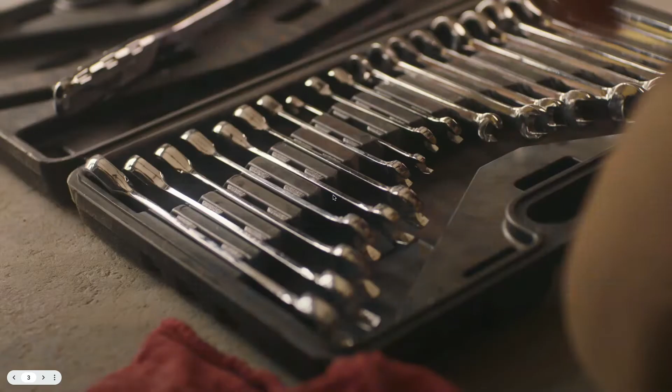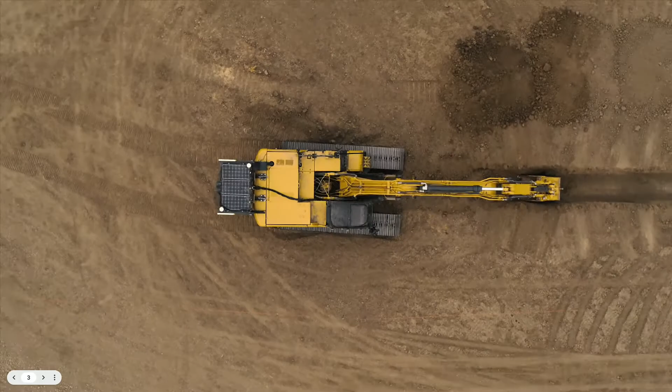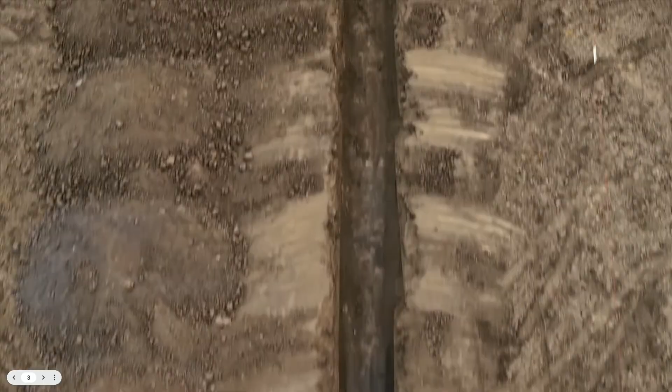We build the same way our grandparents did, with our own two hands. But the tools in our hands change. Built Robotics has developed the most advanced tool available on any job site today, the Exosystem. It transforms any excavator into a fully autonomous robot made to dig the earth. It's powered by a liquid-cooled computer with sub-centimeter RTK GPS, high-efficiency solar panels, an all-weather, all-terrain design. And you can easily switch from manual to AI mode with a flick of a switch. But most importantly, it can dig.

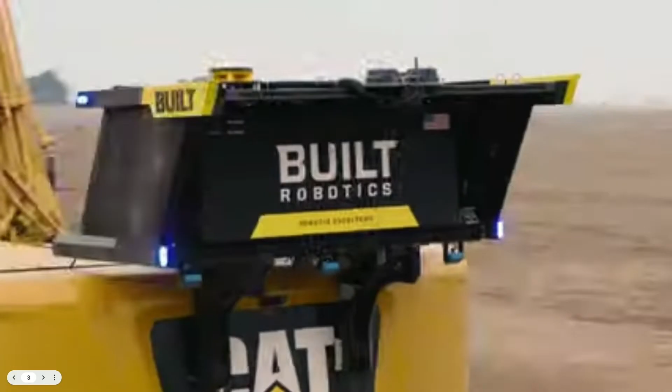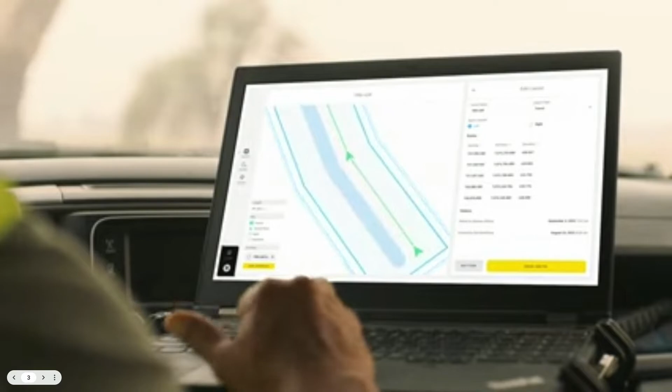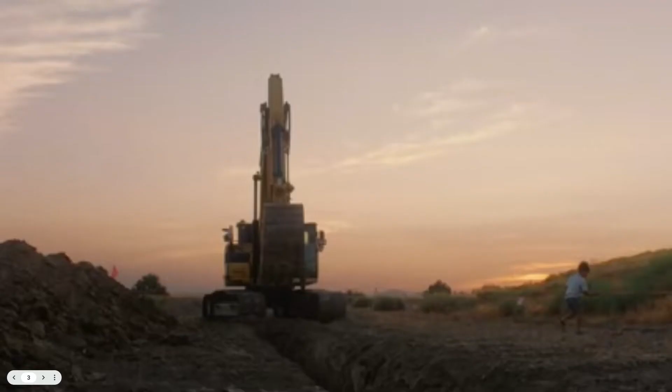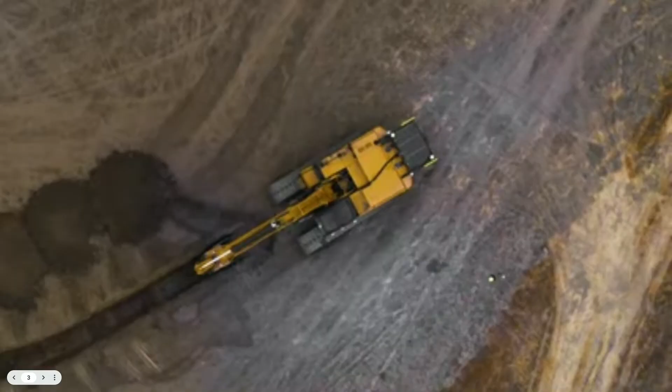Does the idea of an 80,000-pound robot scare you a little? You'd be crazy if it didn't. That's why we've developed an 8-layer safety system with 360-degree camera coverage, proximity radar, 110 decibel safety alarms, ultra-bright LEDs, high-vis barriers, a digital geofence, and hardwired and wireless emergency stops. Because when it comes to safety, more is more. We're here because of the builders who came before us. They created the world we live in, our roads, our cities, our homes. And when they needed a tool to overcome a new challenge, they invented it. Now, it's our turn.

So that should have given you a sense for what we're talking about. These are fully autonomous robots. We take existing heavy equipment and we can upgrade it to enable full autonomous capability. And we'll talk a little bit more about the product in a second. But just to give you a sense for who we are: a construction technology startup based in San Francisco, California. We were founded back in 2016, and we have achieved a lot in that time. We have over 18,000 hours of autonomous operation to date with no safety incidents, which we're very proud of.

We are a venture capital-backed company. We've raised over $100 million from some of the largest and most esteemed venture capitalists in the world. And we have a phenomenal team that sits at the cross-section of technology and construction. You can't have one without the other, and so we believe that you need to bring the best minds from both in order to build a tool that's actually useful for this industry.

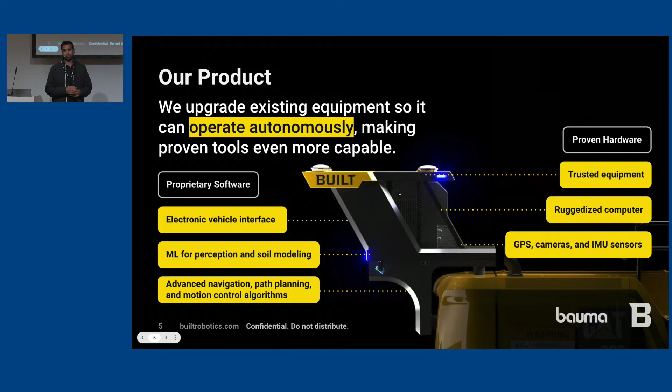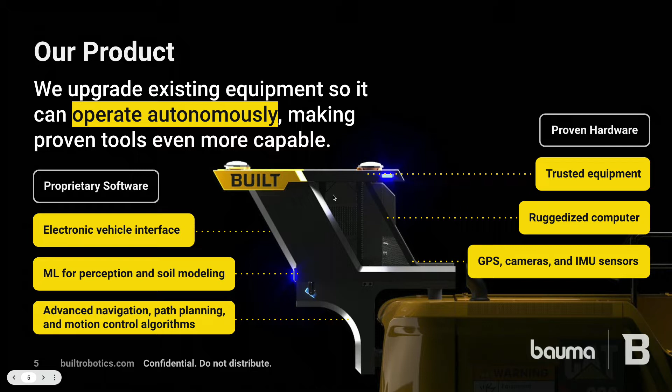So what's the product? Some people ask us, are you building these excavators? The answer is no. We take existing heavy equipment that the largest OEMs, Caterpillar, Volvo, Komatsu, build, and we can enable autonomy by installing what we call the Exosystem. And that's what you see here. The Exosystem is this unit that is comprised of a handful of different sensors, RTK GPS, IMU sensors, and we basically install that on this existing heavy equipment. And those sensors are basically what we use to collect information about the environment.

So every second, we're collecting thousands of data points on what is the orientation of the excavator, where is it located, where is the bucket, where is the stick, and we can stitch all of that information together in order to make intelligent decisions on how to actually move the excavator. So the way the decisions are made is the software, and that's the core piece of the Built Robotics technology. So we have a team of roboticists and software engineers who have built this reliable software that runs on our onboard computer, and that software is basically sending signals to the excavator in order to actuate the hydraulics and actually move and dig the dirt and complete the task that the machine has been given.

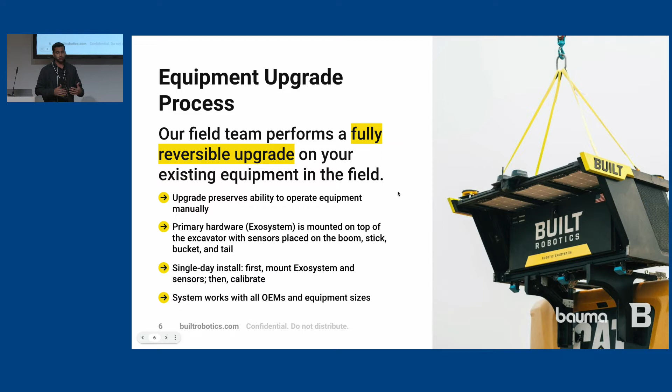So that equipment upgrade process is actually a very simple, non-invasive process that we've developed. So the Exosystem is mounted to the counterweight of the excavator, and it ties in to the onboard electronics of the excavator itself. We actually preserve the manual operation capabilities of the excavator. So we think that's very important. Robots will be very good for certain tasks, but from time to time, you still may need a human operator to jump in the cab of the excavator and take over manually.

And for that, it's a very simple flip the switch, and you can take over manually. So we think that's strategically very important. It is a one-day install, so it takes a couple of hours to actually install this unit onto the machine.

And then we also run a calibration process, because every machine has unique dynamics. And so we want to make sure we capture that. So we run a simple script, and we're able to capture all of that. And then your machine is ready for the tasks at hand.

And it's also important to highlight that our system is compatible across OEMs and equipment sizes. So we think it's also very important that we are not dictating what contractors need to use, what type of equipment. We want to build a solution that will work with whatever equipment that you guys are using.

The second side of our technology that's important to highlight is how do you actually communicate with a robot? So we install the exosystem onto the machine. The machine is now capable for autonomous operations, but a human supervisor still needs a way to communicate with the robot, and that's where our user interface comes in. So the user interface is a very intuitive software solution that we've developed.

You can run it on a laptop or a tablet, and basically at the start of a day, a robotic equipment operator will come to the machine, they'll fuel it, grease it like they normally do, and they'll turn it on. At that point, you would launch this software application we call Everest on your laptop, and you can connect to the robot, and then you would communicate to it what task you want to complete that day.

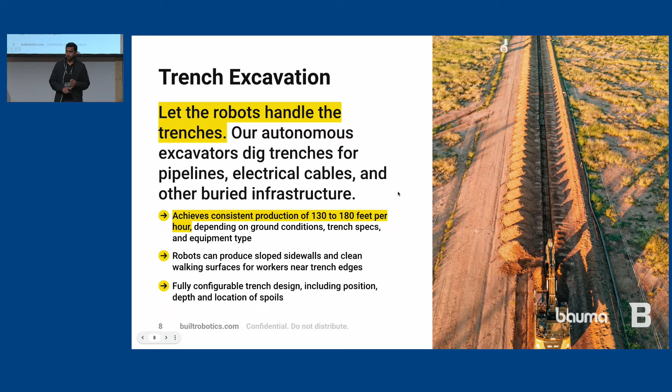So that brings me to the specific task that we have launched commercially for the robots. So trench excavation is something that these robots are being used for today on commercial job sites in both the US and Australia. Trenching was one of the first products that we rolled out because it's very good for robots. Basic, repetitive task that takes place over large quantities of earth.

And so there's a big opportunity to create a lot of value in the construction industry, but it's also a particular task. It's narrow, it's focused, and so we can make sure that we're deploying a product that works day one and that's reliable in the field.

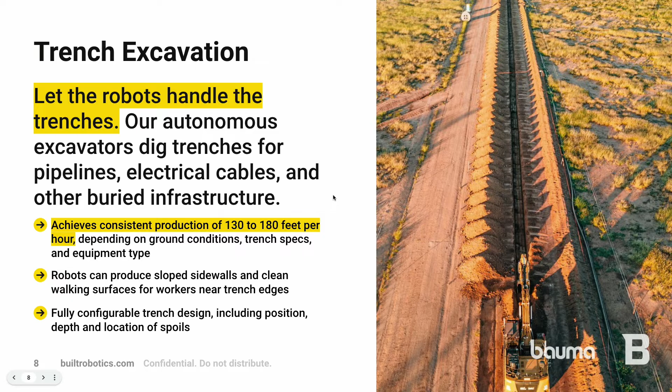I think it's very common for a lot of technologies to try to take on too much and to try to over-engineer solutions, and what you end up with is more of a science experiment than an actual commercial product. And that's what we've really focused on as a company, to make sure that we are actually shipping products to the field that are useful for customers day in and day out.

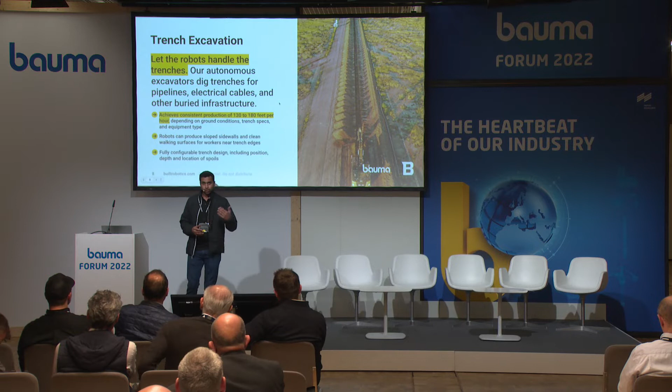So on trench excavation, I'm sure many of you are familiar, but this is a critical piece of work that happens any time you have buried infrastructure for large sites. And so the types of projects that Built Robotics has been deployed on tend to be large greenfield infrastructure projects. As you can see from these pictures, you're in the middle of nowhere, and these are big scopes that are taking place over long distances. So pipelines for oil and gas, electrical cables for solar, wind, utilities, things like that.

And one of the problems we're solving by working in such remote environments is that it's often very difficult to find skilled labor to work in these places. So a lot of contractors in many countries around the world are struggling with a challenging labor shortage. And so our solution is meant to help automate basic repetitive tasks, so you can reallocate your skilled human labor to higher value tasks on the job site.

The robots basically dig these at 130 to 180 feet per hour. So that's anywhere from 40 to 55 meters per hour. And we can produce sloped sidewalls and clean walking surfaces along the trench. So contractors are finding that the output and the quality of the work that these robots are producing is usable, and they're able to actually put the pipes and the electrical cables in the ground right after the robot.

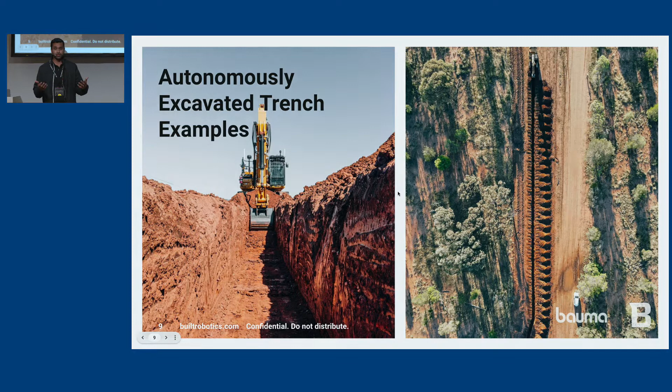When you have a computer digging, it is very precise, and it will do exactly what you asked it to do. And so the room for errors goes down significantly. You can ensure that the output of the work is within tolerance. And so these are some of the other benefits that we see from robotic solutions in the construction industry. We like to think of it as an outdoor CNC machine. So once you've provided the parameters, the locations of where you want the task to be completed, the machine will go and do that very precisely.

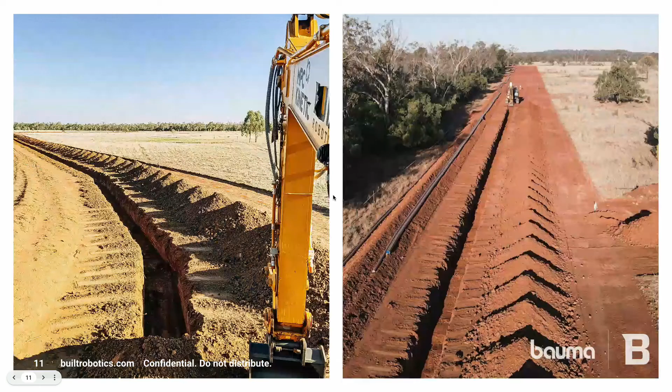And then it's also worth mentioning, I get asked a lot, can it dig curves? Can it dig not just straight lines? And the answer is yes. Basically, you need to provide the robot the endpoints, the GPS endpoints for where the trench needs to go, and then the robot will connect the dots.

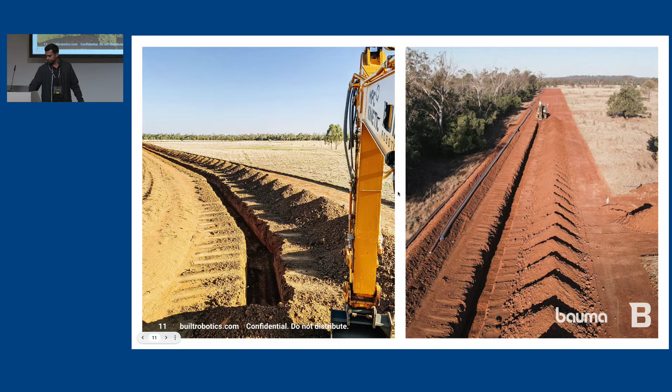So why is this important? Why has Built Robotics embarked on this journey to unlock automation for the construction industry? And I think that's the theme of today. A lot of people are asking this question. We kind of boil it down to two big categories. The first, which is incredibly important, is that there's an opportunity to keep workers safe.

If you can take operators out of the cab, out of harm's way, when you're doing a lot of these mundane, repetitive tasks, you essentially are taking workers out of the line of fire. I think we all take that very seriously. We want our people to be safe. And so we think of this as another tool in your toolbox. When it's appropriate, you can actually get the workers out of harm's way and reduce safety incidents.

The second piece, of course, is transforming profitability. I think there's a lot of great data out there that shows that labor productivity in construction has actually decreased since the 1950s. We are an industry of innovation. You look at the equipment outside, the engineering marvels that we've achieved as an industry are next to none. But I think in the last 30 to 50 years, while other sectors like manufacturing have embraced new processes, new technologies, construction has had a tough time to actually embrace some of those.

And you can trace some of that to it being an operationally intensive industry. Taking risks can have incredible downsides. You need your projects to be delivered on time and to scope. And it's very, very hard to try something new. And so I think automation, though, is the next biggest thing after hydraulics in the construction industry. And it's going to really force us to rethink how we build.

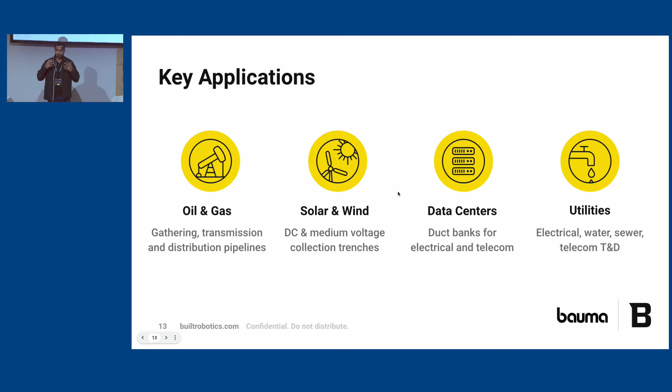What you'll notice is not on this slide is working in dense urban centers, working in congested environments. Autonomy is not quite ready for working in some of those confined spaces where the judgment, the eyes and ears of a human are going to be better. That being said, when you think into the future, we certainly believe this technology will continue to improve, sensor technology will continue to improve, and we will be able to address more and more of these cases over time.

And again, not to just rely on visual cues, we have a sound. We have a beeping sound that plays as well, and that is an audible cue. So just in case you're not looking at the robot, you can hear it, and you'll know that there's a robot working in the area.

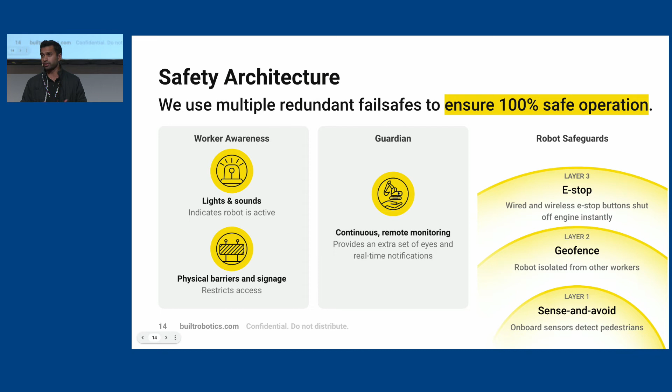And finally, the last layer of safety here is an emergency stop. So we have wireless and wired emergency stops. The wireless stops work from a far distance. They use radio frequencies in order to safely stop the robot. These are safety-rated systems, and it is the fastest, most reliable way to stop the robot if anything were to happen on a job site or if you needed to stop for any unsafe conditions that are observed.

So like I said, we didn't want to just be a science experiment. To us, building a commercial product that is useful day in, day out for our partners is very important. So we are fortunate to be working with some of the largest EPCs in the world, the likes of Bechtel, Mortenson. MPC Kinetic is a pipeline contractor in Australia that is using our robots.

But the idea here is that we needed to get this tool into the hands of customers who are using this every day and who understand how to use a tool and get as much value out of it as possible. And this is how we're changing the industry each day.

Finally, who uses this? So Built Robotics is not actually a contractor. We're not sending our people to site and running these robots each day. We are a technology provider. And so we train the operators that our customers have on becoming robotic equipment operators. And this is a new type of work that is coming out because of these advancements in technology.

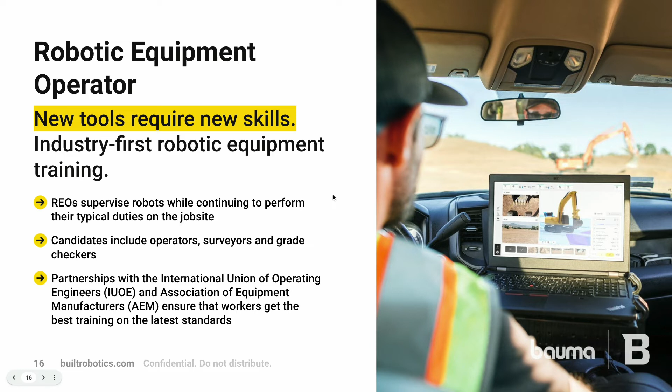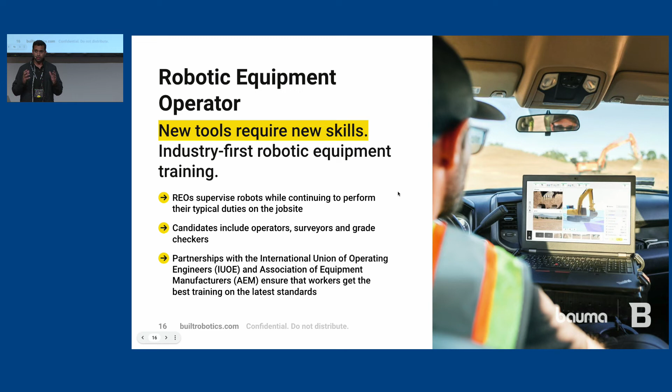So I think a lot of people ask, does automation mean that there are no jobs? And I think the answer is a resounding no. There are actually new jobs that are coming out as a result of automation. And the robotic equipment operator is going to be central to being able to effectively utilize robotic equipment in the future. So the robotic equipment operator is the person that we train who will supervise the robots throughout the day, ensure that when the robot needs to move to a new task, that sequence is performed, and that the robot is getting the right support it needs from the site.

So if an area needs to be graded before you're going to be trenching, or let's say the pipe layer crew has fallen behind, you need someone who is in charge and who can help orchestrate all of these tools working together on a site. The types of profiles that we see that are effective for robotic equipment operators are obviously equipment operators. Surveyors and grade checkers are actually quite good at this as well, particularly because they are quite familiar using digital technologies like GPS.

Finally, for Built, we're very proud that we've actually partnered with a lot of large players in the construction ecosystem, like the Association of Equipment Manufacturers, or in the United States, one of the largest labor unions, the International Union of Operating Engineers. They've partnered with Built Robotics so we can train their members on our technology.

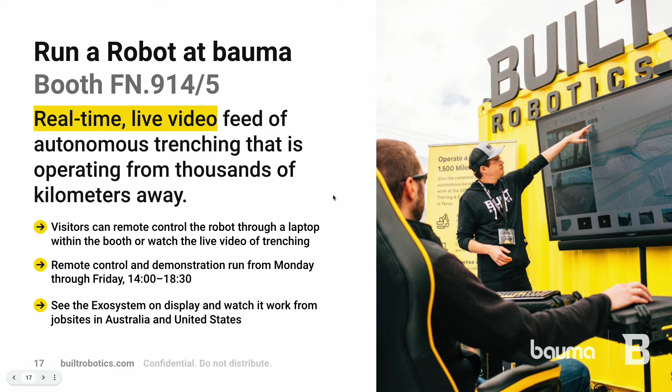So we are here all week. We have a booth in the North Lot, FN.914/5, and we are running a demo all week. So from our booth at bauma, you can send commands to a robot in either Australia or California. So from thousands of miles away, it's not just remote control. We do have that feature, and you can remote control those excavators. It's kind of fun. But you can also set it up for autonomous mode and press start and watch the robot work from thousands of miles away.

And so we very much think that it's not just the future. These robots are out there, and we're hard at work trying to bring this to market and scale it every single day. And we're very excited to be here with partners like yourself to help take our industry forward into the future. So thank you very much for the time. And if we have maybe a minute or two, if there's a question from the audience, more than happy to take it.

Yeah, is there a question from the audience? Yeah. Do we have a microphone somewhere? We had it before. Yeah, maybe I can just give you my microphone.

Yeah, hi. Thanks for the presentation. I'm Geir Ståle Kleppe from Steer, and we are retrofitting equipment to run dump trucks autonomously. Have you done other stuff than excavators, and what other machines? Sure. So I think the question was, have we done anything other than excavators? And the answer is yes.

So actually, the history of the company is the first type of equipment we prototyped was a track loader. And then we put a bunch of different attachments on it. So we put a blade on there, we put a breaker attachment on there, and we did a lot of pilot projects in the state of California to demonstrate that we can actually automate different types of equipment and perform different types of tasks with it as well. From there, we actually graduated into autonomous bulldozers, and we did a lot of finish grading activities with it as well. But ultimately, the excavator has become the workhorse platform for Built Robotics.